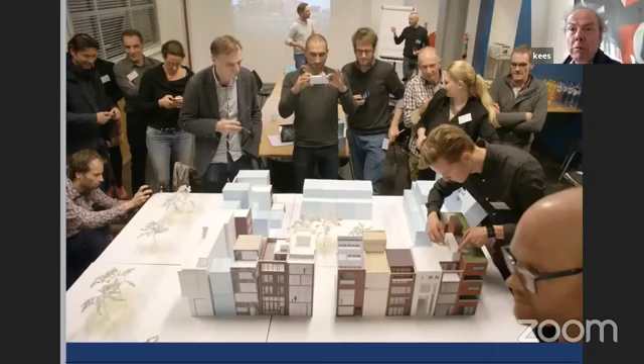So it's a very difficult way of working, but as soon as you get a little bit of experience in it, then it works quite smoothly. I think this process and the whole process of urban design is extremely dependent on experience. Probably that's also why urban designers are mostly old men like me, and not so young when they get big projects, at least.

Here you see a picture of how we work in this kind of process. So this is a housing block in Rotterdam. In the old days, we would just design the whole housing block, and people would get an apartment and start living in it. But this is working differently. Here the plots are being sold to people, and the people who buy them can bring their own architect. And we, as the urban designers and architectural supervisors, develop the rules and the typology principles according to which the houses are built.

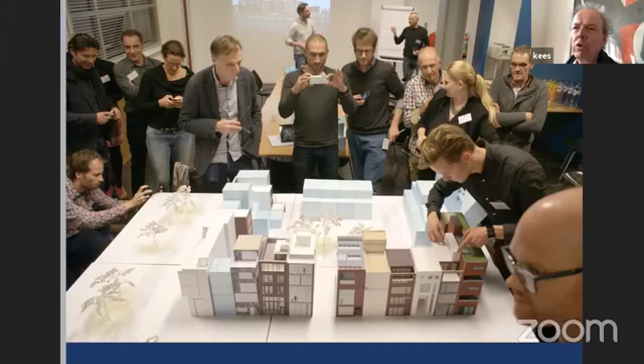So on the one hand, you have a strong coordination to create a project together. And on the other hand, you have the possibility for people to create very individual structures. And a big advantage is that the whole legislative approval process and also the budget control is much easier than when people build individual houses. So here you see the first houses being ready.

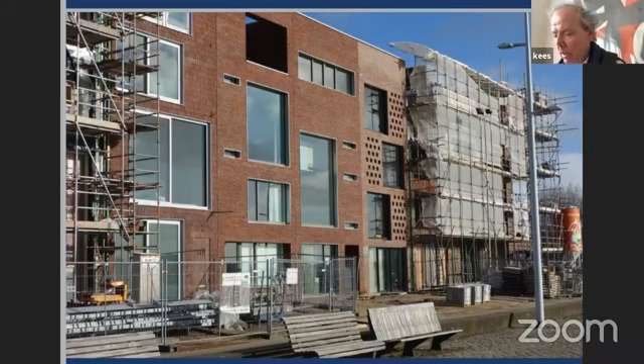And so we coordinate between the architects, which are sometimes one-man offices or young starters. We coach them to build in this integrated whole of a perimeter block. And the result is a kind of typological diversity, but also a social diversity, because different people are interested in living and working here. Of course, we work with co-working spaces. Houses are not anymore exclusively meant for living, but should also allow for work and home office, specifically in the times that we are in now.

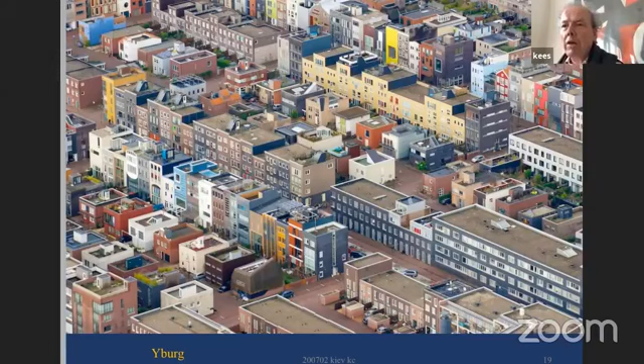So a result of this culture, which is a bit of a Dutch specific culture, is this kind of diversity, which some people find a terrible mess, and other people find a fantastic collection of anarchistic architectures. I think it really doesn't matter so much, but it is very clearly an expression of a very decentralized democratic society, where the diversity goes down to the one unit of the household instead of larger groups. So I think it is a very interesting phenomenon, and we are also working in that.

The idea of our office is not only to create perfect designs, which we not always do, of course, but primarily also to create a kind of community, an exemplary community of design people that are active in society. This is also the reason that we work a lot with conversion of former industrial sites and port sites, like here in the harbor of Amsterdam. I wrote a book called City as Loft, which is about this type of project.

And it was not possible to do this without building towers, because without building towers, you would not have enough building volume in order to change the office buildings in the lower area. We did not define where the towers were or what they will look like. We made a kind of game out of it. It's a very old game. It was already designed in 1991.

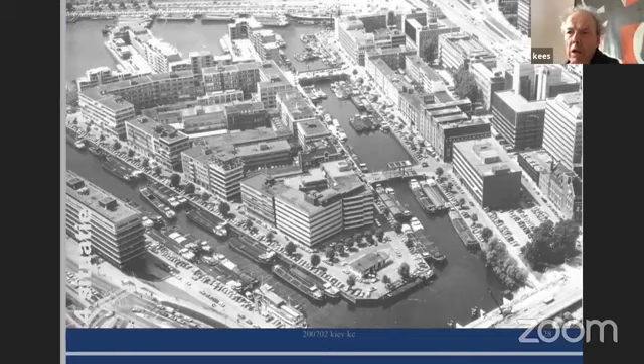Here you see the existing triangle with 1950s office buildings. They were half empty, they were derelict. And here you see the principle of gradual increase of density by building towers. And these towers had to behave themselves according to certain rules so that they would not hinder themselves, they would not spoil each other's view, and they would not cast too much shadows on their neighbors.

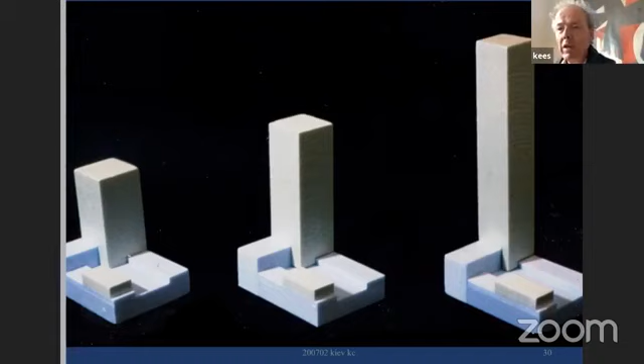So there was a whole set of rules which would lead to the situation that when you would build, you would not build the left tower, because you would build a fat tower with a lot of apartments on the north without sun and view. And you would not build the tower on the right, because that would be very expensive and have mainly staircase shafts and a little bit of space for apartments. So you would be somewhere in the middle. So this regulation more or less mediated automatically what would be the result of the buildings.

And here you see what is going on now. In the meantime, there are even more towers that are under construction, and it's extremely successful. But what is actually the most important merit of the project is that it gets people back into the city center, because they are all apartments. And the buildings have street level areas where gradually restaurants, galleries, and so on are settling down in an area that used to be relatively empty.

And so it's quite an important piece of urban renewal in a social sense, apart from the exciting skyline that is being generated. So this is the tower we built ourselves. It's a podium with offices and shops and galleries and a hotel. And then on top of it are two housing volumes, one tower and one block that is cantilevering across the water. On the other side of the water, you see the Art Academy that we also constructed, but I won't talk about it today.

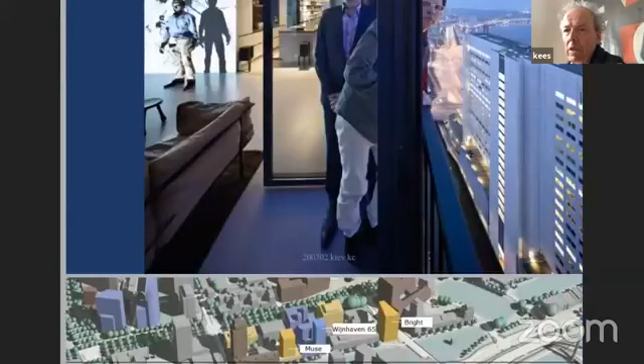Here you see a kind of overview of towers that are still under construction. And we have had a fight with the city. So you can see that an urban designer only has a limited influence on his city or on any city. After a while, something else happens, and then your concept is being lost, because the front towers that you see along the water do not comply with the rules. You see that they are much fatter.

This is a mistake by the local government of the city, and the result is that a lot of the slender towers in the middle will lack a view to the river, which was not the idea of the original urban design, but we cannot do anything about it.

So this principle of densification as a kind of means to create money, to create more mixed use and more urban value and more social exchange, we have been applying in other cities. This is the main railway station in Zurich. And on the other side of the tracks, you see a whole development, which was designed a little bit according to the same principle. Here you see an impression of the central space, the so-called Europa Allee.

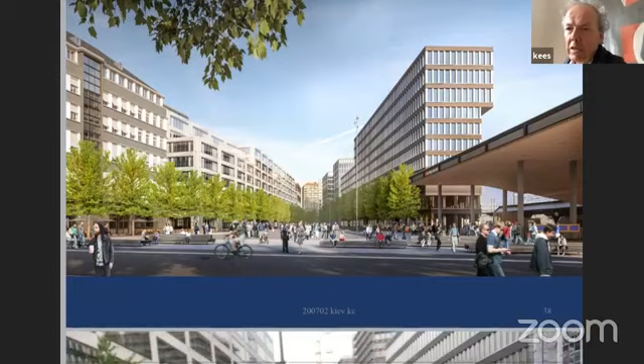You know that Switzerland does not belong to Europe, but it's still called the Europa Allee. And it's a conical space in which building blocks are built. And these building blocks, again, they are about 20 meters high, but above 20 meters, they may have a certain volume as long as they do not hinder other buildings. At this moment, the project is almost ready.

And this is a picture of all the KCAP people, all the people of my office, about 120 people that recently visited the site in Zurich. We do a kind of social event and excursion once a year with all people of our office. And you see that the space is becoming quite intimate and quite urban, and the density does the city very, very well.

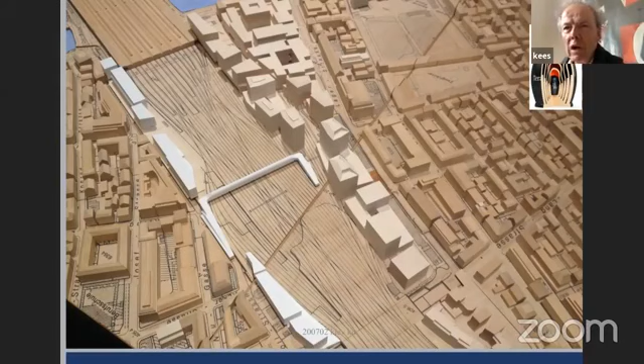Here you see the model, and you see that the principle is consisting of blocks, and most of the blocks have two little towers on top of them. This was started in a competition by one architecture office, Caruso St John. And then in the next competitions, this was taken over by other architects, and it creates quite an interesting harmony between the different building blocks.

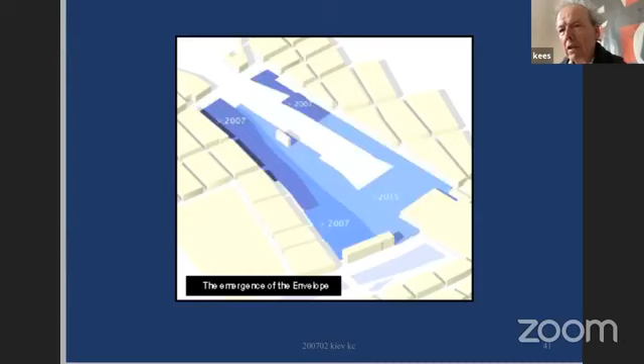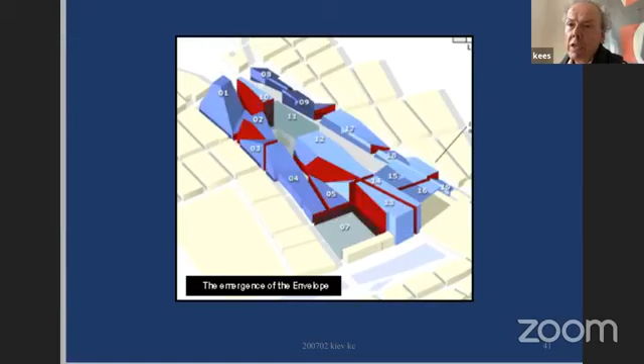We apply here a principle of subtraction, which you see symbolized by this dynamic picture. So when we build in such an area, we do not, like a traditional classical architect, look at what kind of beautiful architectural sculpture we can make there, what is the maximum height, etc. No, we are filling the site like a big chunk of cheese up to 120 meters full, and then we start cutting out the public space.

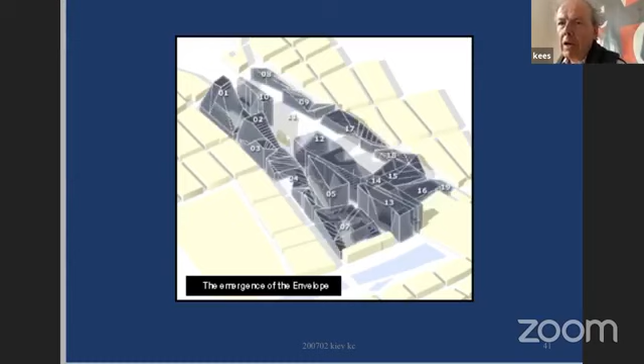Then we start cutting out the planes that produce too much shadow, and at last we are cutting out the view lines that we want to have in the area. And then the residual envelopes are the maximum building parameters for the buildings of the blocks that are going to be constructed. So you can clearly see that in this model.

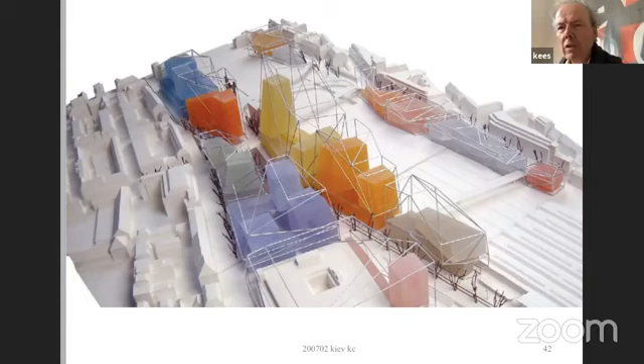So the wireframe that you see is the maximum building envelope, and the colored volumes inside the wireframe are the actual buildings that can be very different and very diverse, as long as they meet the regulations that we have been imposing. It leads to a much more creative urbanism. It also leads to a much better profitability of the buildings for the investors. And it also enables a much better division of programming than the traditional way of urban design.

This is one of the buildings, one of the first ones. It is a building by Caruso St John Architects, and the grade level is public space, restaurants, shops.

The podium up to the 20-meter line is offices, and the two volumes that are crowning it are two small apartment towers. So you have a kind of integrated mixed use within the buildings as well. You see some other buildings that have adopted the same program,

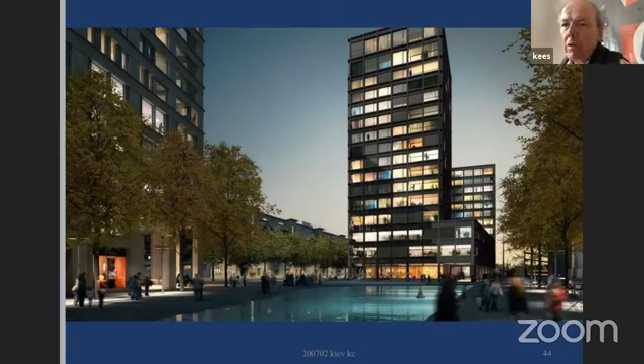and you see here the central square of the area, which was going to be called the Le Corbusier Square, but then the socialist green government of Zurich discovered that Le Corbusier had been a Nazi sympathisant, and then the naming of the square was dismissed. I don't know what it is called now.

Here you see another building. This building is very interesting because we had a lot of protests from local people and specifically also younger, creative, green and left-wing people against this project, because they were saying this is only investment construction, which it is not, because it has about 60% housing in it. It has cinemas, it has a hotel, it has shops, it has cultural institutions, etc.

And they tried to prevent this project by a referendum. A referendum is possible in Switzerland. If you collect a certain number of signatures, then you go voting. And when the voting is over 50%, then a project is accepted or is dismissed, and then the project just is dropped. So they did that, but we had a 55% majority for this project, so it was constructed in the end.

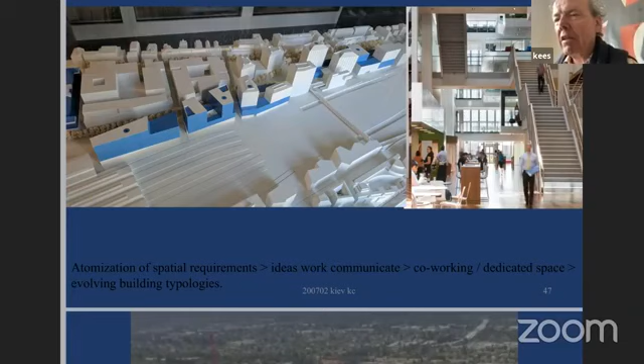which is quite interesting because normally these high-tech firms would have a campus in Palo Alto or anywhere else where they are in the middle of nowhere. They need buses and cars to get the people to their campus. The campuses are gated. You do not get into it. There's no interaction with the city, etc.

And Google was one of the first tech programs. Now also Dropbox and other companies are following this principle to say this is not good. We have to go back into the city, like also industrial manufacturing is gradually becoming clean and returning to the city. And so Google went here, and the first thing they asked was, can we make bridges between the buildings so that we can interconnect all the buildings?

And we said no. We are happy if you come here, but you have to have lobbies and staircases and elevators, and you go from one building into the other by public space, so that you activate public space, and around your entry lobbies there will be a restaurant or a coffee shop where your employees will sit and will develop also their ideas, so that you will contribute to the social machine of the inner city. And so they accepted this, and it's quite successful.

Of course, after a while, they closed their lobbies for security reasons. So you can go into some lobbies, but you cannot go further, which is a pity. But in the end, it's a very interesting development, and also a paradigm shift of the eccentric settlement of high-tech firms, like this one.

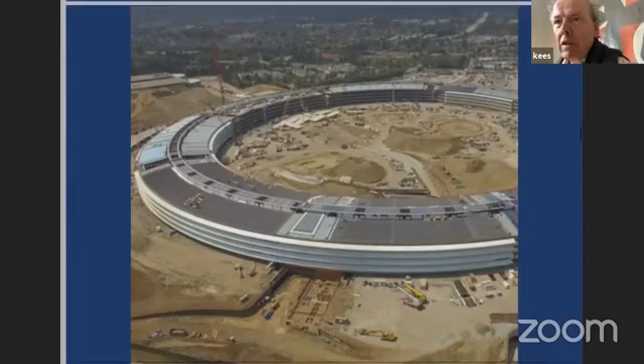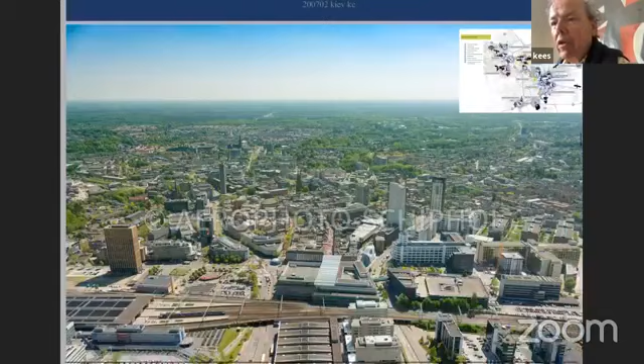It is, let's say, as closed as the Apple operating system, which also doesn't allow any multiple use by other softwares, which I think looks like a flying saucer, like a UFO, utterly modern, but I think it is utterly old-fashioned, and I think the modernity is more to be found in this kind of development that we did with the center of Zurich.

So you can see that we work a lot in railway station areas also. And that is not for nothing, because we are one of the drivers of the so-called TOD, transit-oriented development, which simply acknowledges that public transport is the most important driver of communication and of economic development today, and therefore public transport should be stimulated as much as possible, also cargo by public transport. And railway stations should be hubs in which different mobility forms should connect to each other.

And therefore, they should also accommodate high-density developments where mixed use, living, working, entertainment, etc., are close together, so that they form mobility nodes between other railway station areas, and therefore also reduce the nuisance of the countryside and the overuse of cars and so on.

So we are developing the railway station area of the city of Eindhoven, which is one of the bigger cities in the Netherlands. It is about, I would say, 600,000 residents. It's an important city because it used to be the hometown of Philips, and Philips was the most important multinational in electronics in the Netherlands, like Sony in Japan, in the 1950s and 60s, and still is very important.

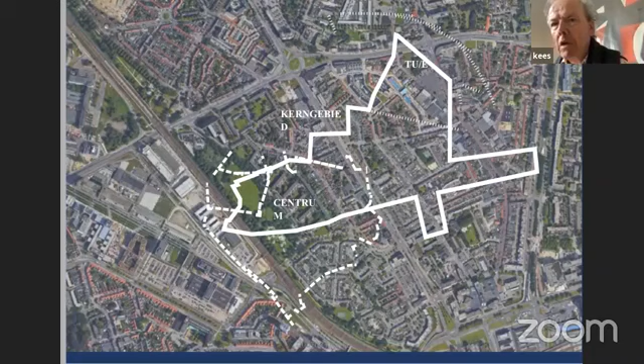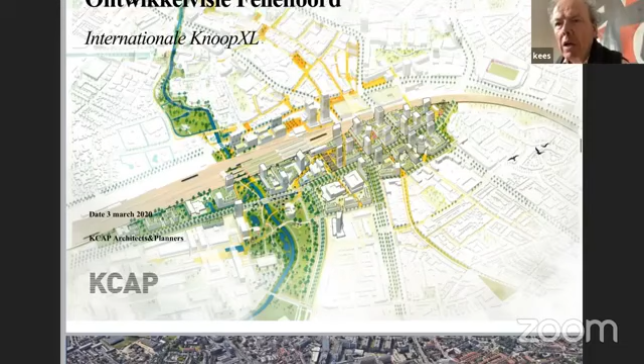This is more or less the area. You see the big white line, which is the area, and the dotted line is the center. And on the top right, you see TUE, which is the technical university in the area. So this is the vision that we have developed. It's an enormous project. It's about 5 times bigger than the Zurich project. And you can see the difference in this slide.

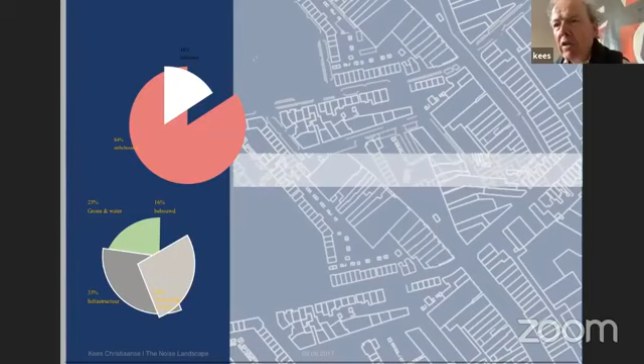So here you see the build. This is a picture that is a little bit distorted, but what I wanted to say is 84% of the area is now non-built, and 33% is traffic infrastructure. The main boulevard is 107 meters. It's a little bit like the boulevards in Moscow, the kind of idiotic Soviet traffic arteries where no cars are running, so wide that you can hardly see the buildings on the other side of the street, like the Karl Marx Allee in East Berlin.

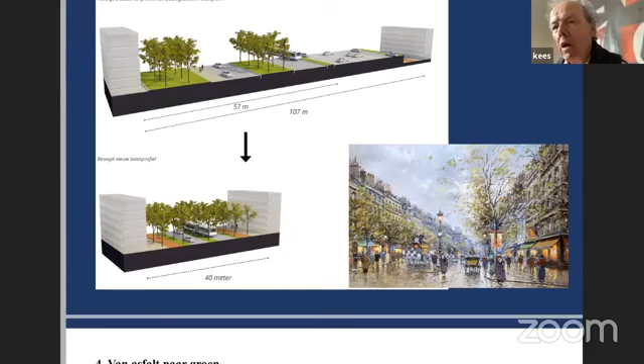And we are going to reduce the main boulevard from 107 meters to 40 meters. So we gain 60 meters of developable land for free. It is city land, so it's a gold mine for the city. I'm sure in Kiev you have the same situation. You can take away a lot of road system, turn it into urban development, and everybody will benefit from it. And you will also be able to finance it because it is land that previously did not exist as commercial surface.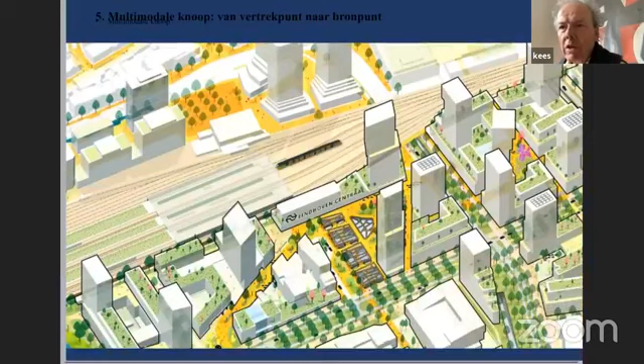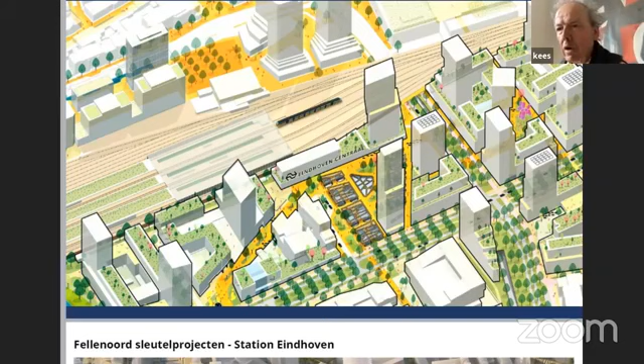So here you see this whole area, including a park and a river. And we create a very fine-meshed pedestrian system. On 2 sides of the railway station, we create new railway squares with bus stations underneath, with a lot of bicycle storage for biking and e-biking, which is becoming extremely popular in the Netherlands. It was already popular, but it becomes even more popular.

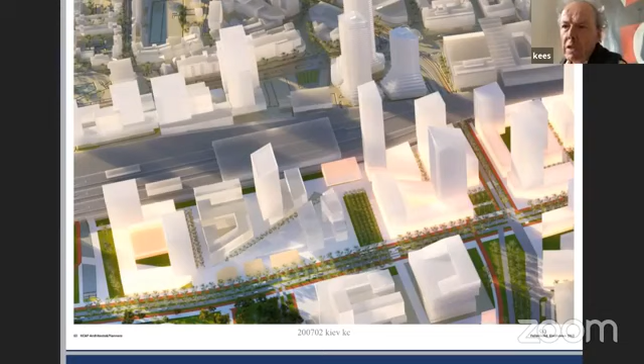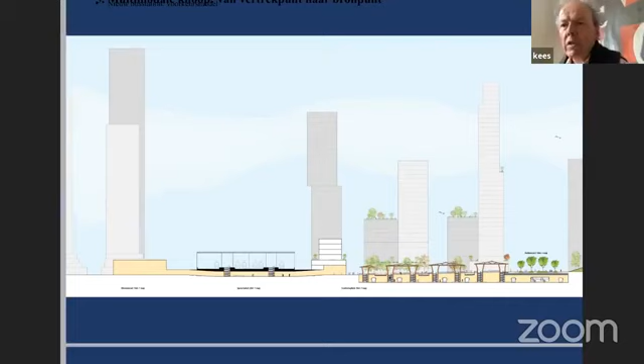And here you see a model that we use together with the city and the architects that are building their projects to gradually materialize the project. It's a very exciting piece of work. You see a section through the passage underneath the railway, which has also been renewed and is a beautiful, generous shopping passage. The bus station and the real estate around it. You see the station square and the boulevard, which has been reduced to 40 meters. And here you see the whole scheme in its diversity.

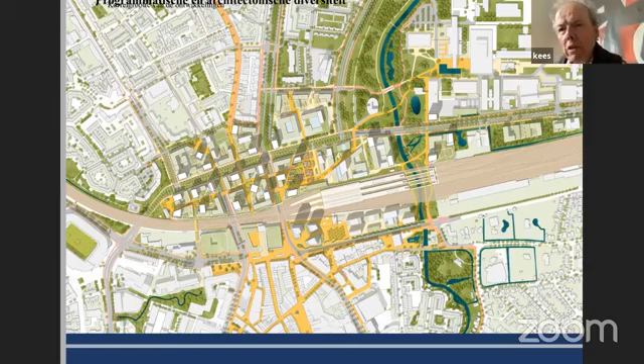So the city actually gets a whole new neighborhood, which largely can be financed due to this empty land, which has a lot of connectivity, activated connectivity between the north and the south part of the city, which didn't exist before, by these yellow lines, where there are a lot of mixed-use grade level activities. And it has a beautiful new park and river, also as a result of taking away road lanes between the railway station and the university in the top right corner.

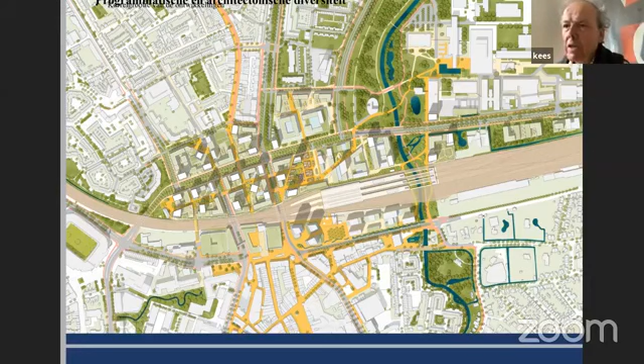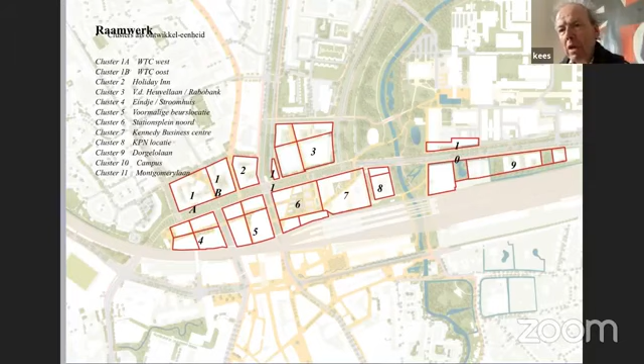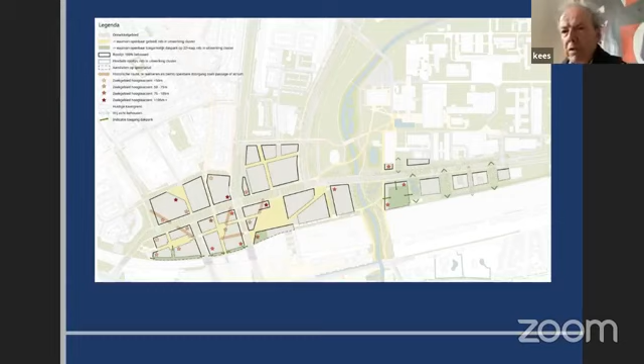We are working with a development framework where we have the owners and the new plots being into one development stream. So successively we are phasing this project and gradually implementing. And we have the same kind of rules that I showed you in Zurich, that I showed you in Rotterdam for the built environment, for the building blocks, so that they can develop maximum density against a good situation in terms of environment, wind, shadow, sunlight, and view.

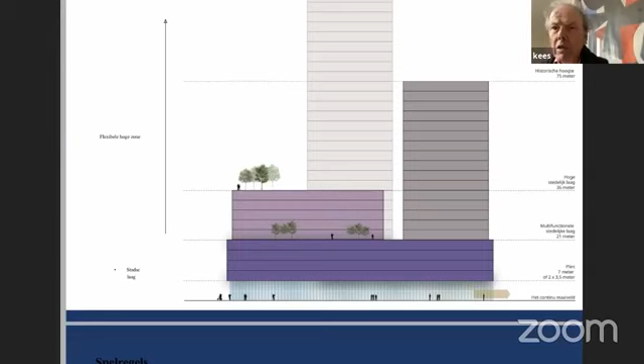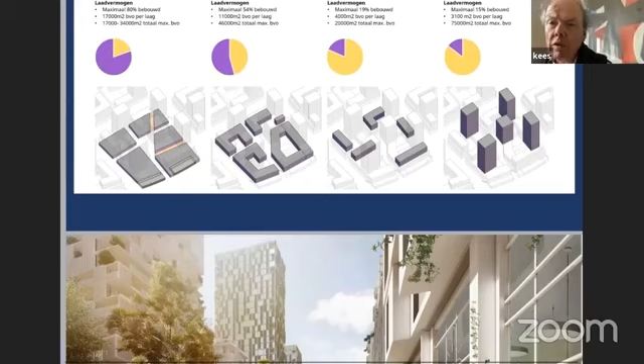They are related to different height regimes from the past in the city of Eindhoven. So there are quite some buildings that are 75 meters high, and there are quite some buildings that are around 35, 40 meters high. So we also want to express this tradition into the blocks, and then we allow also to go much higher, up to a height of approximately 150 meters. Here you see the principle of how that works, and all the development obviously has to develop courtyards that are semi-public, so that also in the courtyards activities can be developed.

This is then an impression of the boulevard of 70 meters wide. It's about the same width as the Champs-Élysées in Paris, which is actually something like 69 meters. So now the first developers and the first architects are coming. So these three towers that you see is one of the first projects. The left tower has already been built, the square tower, directly next to the old railway station.

Here you see a model of that project in the wind tunnel. It's very important. You see that the towers are kind of becoming broader in the socle, in the podium. This is to increase the surface, so that accessibility is directly from the street to the larger surfaces. But it is also a device to create a better wind condition.

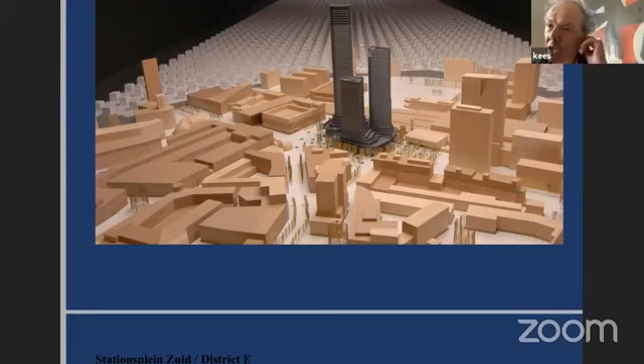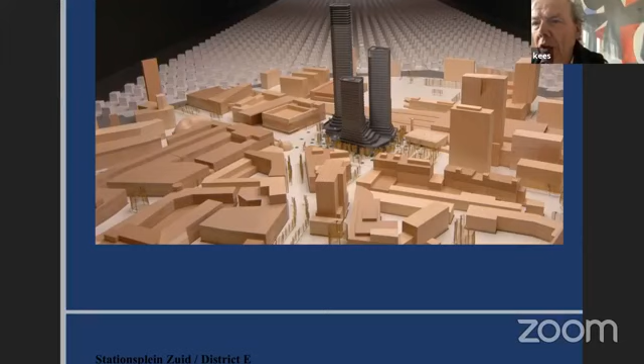So these towers normally, if they would have the same section from top to bottom, they would have an enormous amount of wind production. But by means of these feet, let's say they look like large boots, they get quite a favorable wind climate. And you see that around it, we are creating a new railway station square on the center side. Here you see the main throughway through this area, and you see the step downs of these buildings.

And in the end of this axis, you see the first Philips building, the first big industrial Philips building, which was built by architect Roosenburg in relation, in reference to Sullivan's industrial architecture in Chicago. And this Mr. Roosenburg, he was the grandfather of Rem Koolhaas. So you can see a little bit where the family tradition of this architect comes from.

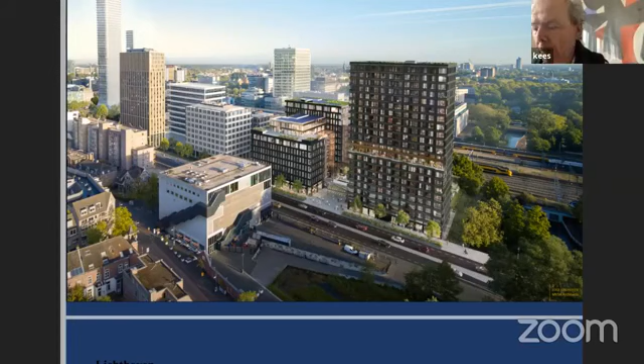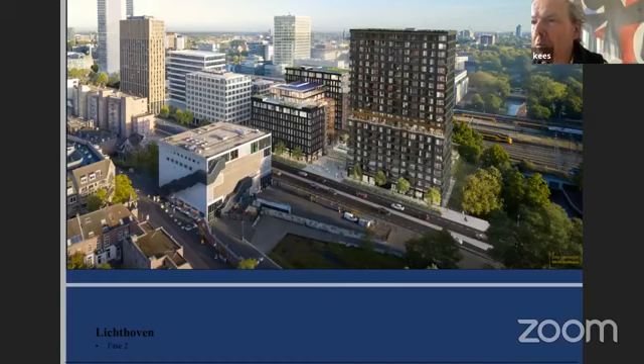This is the other side. So on the left side, you see the towers I just showed you. In the front, you see a pop concert building designed by MVRDV. And these black buildings we just approved, and they are just starting to go under construction. You see, by the way, on the right-hand side, the river running under the railway, but the hole underneath is still very, very tight.

And you see that we are working on other buildings around it. This is a very interesting building for a telecom company, which has a very specific energy label system and a specific materialization.

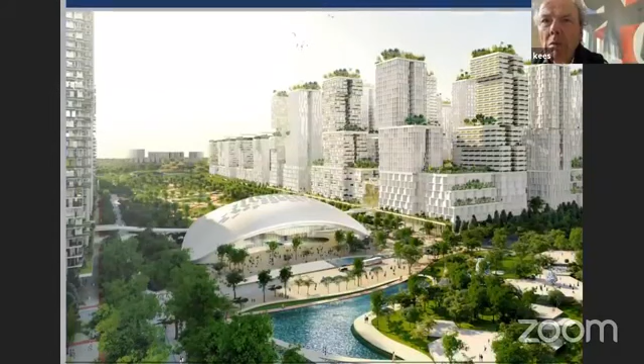The biggest railway station project that we have ever been doing, and probably will ever be doing, is the Jurong Lake District in Singapore. This is a project of about 4 million square meters of mixed-use development with an underground railway station. It was an international competition that we won, and we have been creating the master plan in the past couple of years. It is now resting because of the Corona crisis, but it will probably be taken up later for further development.

And the principle is that all those principles I told you about before have been returning in this project, only on a very big scale. So the minimum height of towers here is 130 meters. And we didn't allow for a Dubai skyline. We said, okay, if that is the case, then every tower is going to be 130 meters and every roof has to be flat and has to have a roof garden, so that from far away you will see a neighborhood that consists of one big plane in the air of roof gardens.

This is possible in the tropical climate, where you can really grow very large vegetation elements on the roofs of buildings. You can see it in a minute in other pictures that I show you. And the idea behind it is that we create blocks that are so unbelievably dense that we free up an enormous amount of public space, so that the built footprint of the neighborhood is very low. And therefore the amount of public space and park, which is extremely important in countries like Singapore with this tropical climate, is maximized. So more than 50%, I think even over 60% of the surface of the neighborhood is made out of green.

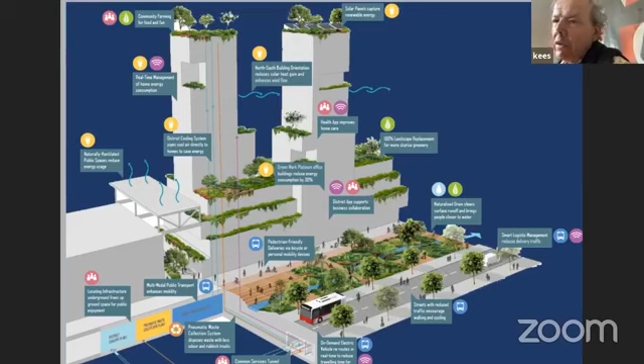The big central park in the middle with the sinus form and the triangular roof, that is the railway station. The railway station is up to 30 meters underground. It also contains all the bus parking for buses that drive down from outside the neighborhood, and all the logistics underneath the park, so that no public space is disturbed by logistics and traffic, and the park system is kept to a maximum. And you see those 3 islands.

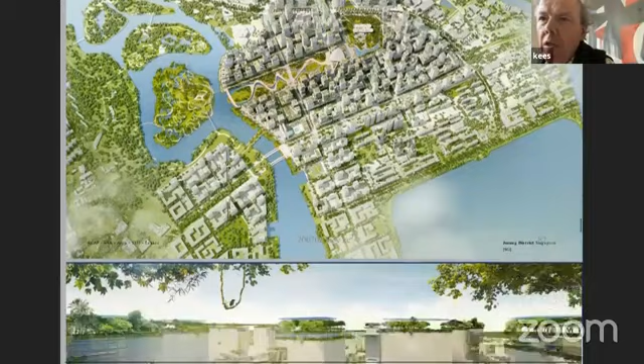So here you see the basic section of how this neighborhood works. You see the streets. The streets are quite narrow. This is necessary in order to prevent sun to go into the streets, so that there is enough shade. In the tropical climate, contrary to in Switzerland or Holland, we don't want to have sun. We want to have shade, because the sun is so extremely hot.

And therefore, we create streets that are all in the direction of the prevailing wind, so that there is a kind of Venturi effect of natural ventilation in the streets, and they are narrow in order to provide shade. You see also the railway station on the left in the section. And then you see that the buildings form a basic podium of something like 10 stories. Then they have a green deck, which is also partly publicly accessible. And you can walk across the roof from the one block to the other block.

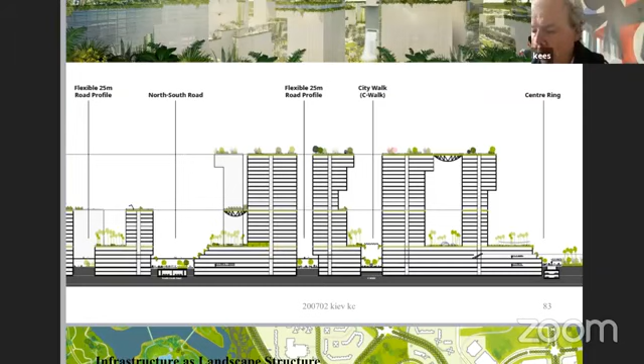And then the towers are starting. And as I said before, instead of in Dubai or in Hong Kong or in Shanghai, all the towers have to be the same height. They have to be flat roofs, and they have to have a roof garden on top, like you see in the top image of this slide.

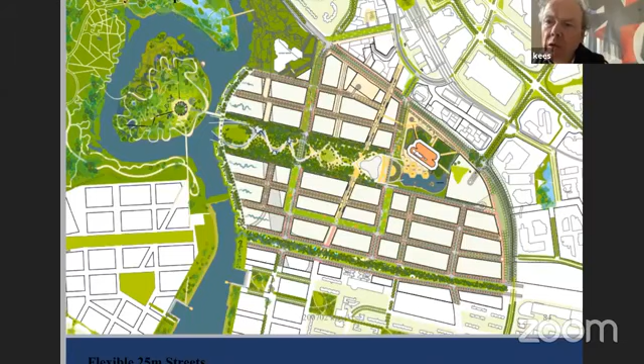Also here we work with the rules. So what you see is only an impression of the character of the urban design, but not the specific buildings, because the buildings and the blocks will be designed by investors and architects that have to follow the rules, and then are being coordinated and coached by us to build their project.

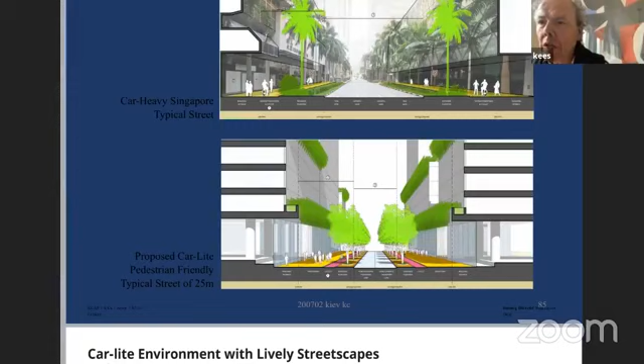The roads, as I said, they are narrow. They also have a flexible profile, so that they can gradually adapt to the development of intelligent mobility. So it starts in the beginning with cars and public transport by buses, because there are no rail connections yet. So then you see the top section, but gradually during the development of the area, they will turn into free bus lanes or pod lanes, and then bicycle roads, and then there will be more and more space for pedestrians. So the profiles of the streets are basically adaptable to the mobility situation in the district over time.

You see an impression of the spatial character of the area, and I think although the buildings are quite high and the streets are narrow, it creates a rather generous spatial impression. We also cover the motorway that runs across the area. So here you are walking on top of the motorway, which creates also a lot of additional public space and real estate, and therefore the calculation of the financing of covering the motorway has been positive, and this is going to be done. This cover will also contain a lot of water absorption system.

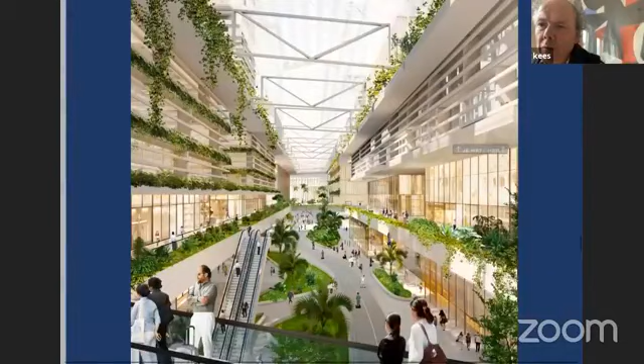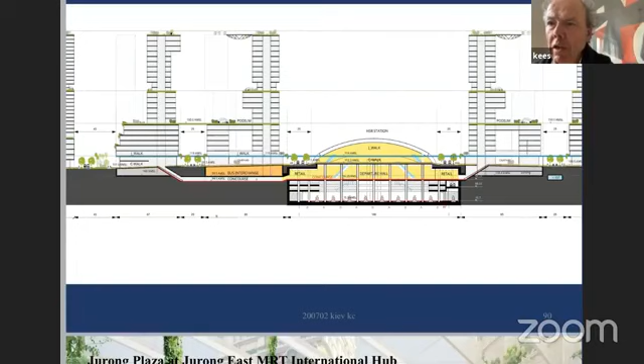So that's the Jurong Lake District, and you see here a couple of impressions of partly also interior streets that all have natural ventilation systems in which by the form of the buildings and the form of the roofs, the airflow is being stimulated, and therefore air conditioning is less necessary, while at the same time in the floors and in the facades, pipes with cold water are streaming in order to keep the facades a little bit cooler than the environment. And here you see the underground railway station embedded in between the buildings. And here you see the railway station square from inside.

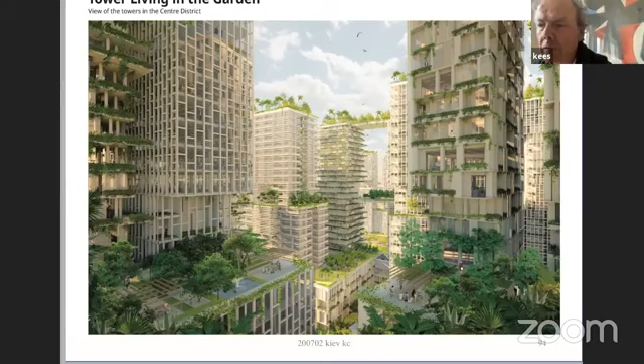Another image. Of course, this is not architecture. This is just an impression of volumes. The architecture that you see is generated by a small software that we have. So we have a kind of software in which, when we draw volumes, we can automatically differentiate it with different facades and so on, which is very handy because you can work much quicker.

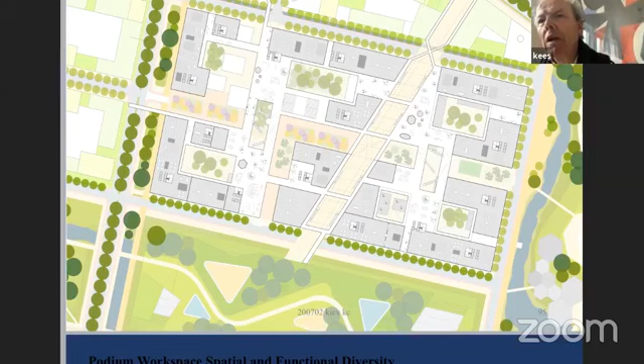And this is a typical block in the Jerome Lake District, which shows that it is not closed, but it's open, because we want to have courtyards that are activated. And above all, we want to have the spaces naturally ventilated and not covered and be air conditioned. So this is the kind of character that will be hopefully realized in this Jerome Lake District.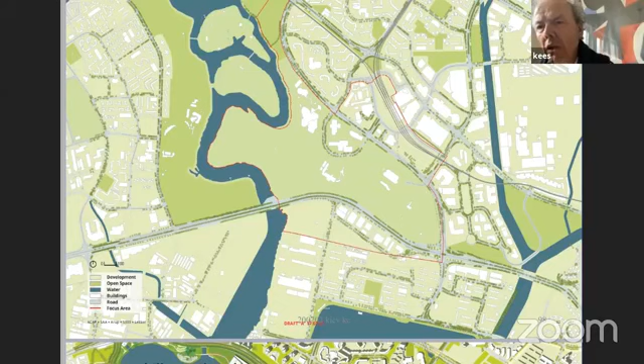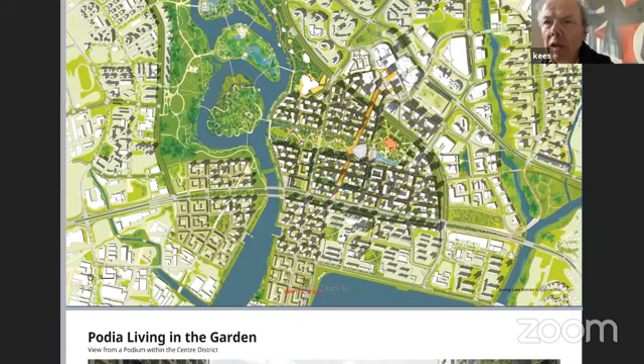And here you see the existing situation with the motorway below and the peninsula still connected. And here you see the developed area where the motorway is covered. There's a connectivity to the sea of public space, and you see that the islands are detached from the mainland. Yes, so that was Jurong Lake District.

And I would like to finish with continuing on water, because we are increasingly working with water, which is also, of course, natural for us as Dutchmen. And we are also exporting our knowledge with water to other countries, among others to the city of Shenzhen, which you see here, which is one of the biggest cities in the world.

It's about 45 kilometers long and about 35 kilometers wide. And you see that it has a lot of hills or even mountains. Sometimes they are almost 1,000 meters high. And in these mountains, they have created over time a lot of reservoirs, the blue ones, which are the original drinking water reservoirs. And of course, they are partly old and not usable anymore.

And we are creating a concept of how to use these reservoirs for public space, but also for water management and stormwater catchment and runoff in the city, and also how to reopen the rivers in the city of Shenzhen and the streets to have the rivers on the surface again, have them natural again, let them evaporate the water and create a better climate for the city.

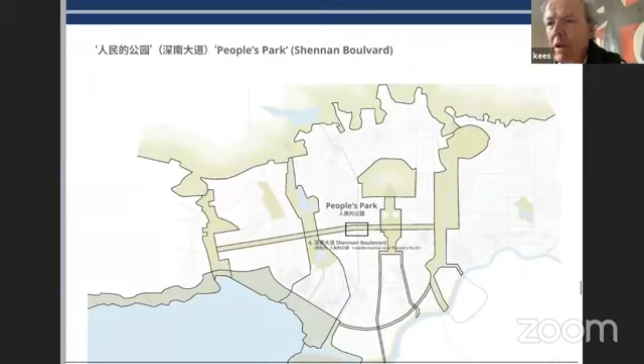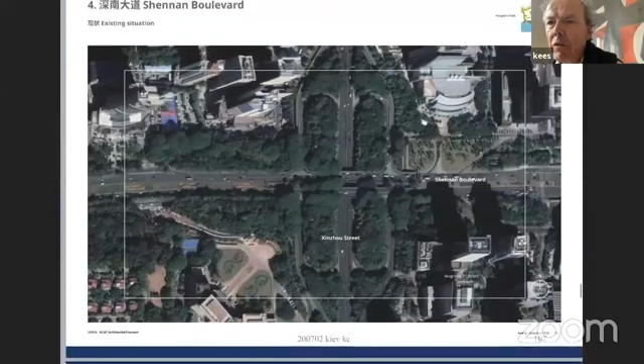So one of the projects is the central streets in Futian, the center of Shenzhen, which is this one. We do a little bit the same as in the city of Eindhoven. You have enormous motorways, like you see here, with a lot of green where nobody goes. And you have an enormous potential of development, and at the same time there is a need to recreate better green, environmental green, and better water management. So we are working on a lot of exemplary road crossing sections.

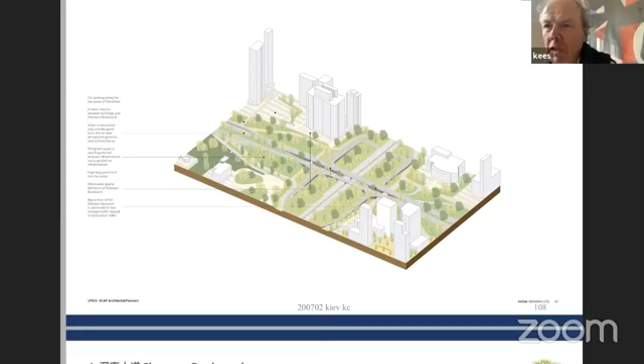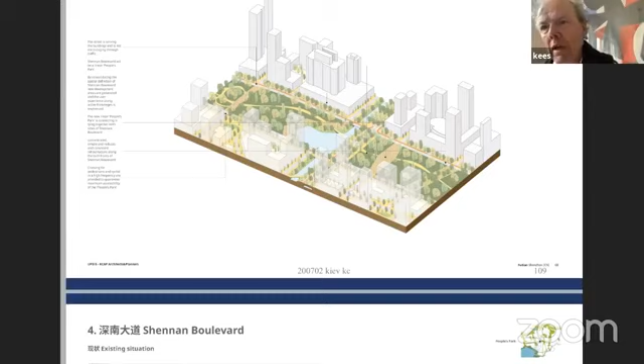This is one, for instance, where you see the existing situation, and you see the future situation, where we take away the motorway, we make normal urban streets out of them, we introduce surface water again of the river that is in pipes underneath the streets, and create a park that is accessible for residents on the spot where the motorway was. But at the same time, we add built volume, which can then also partly pay for the investment in the public infrastructure.

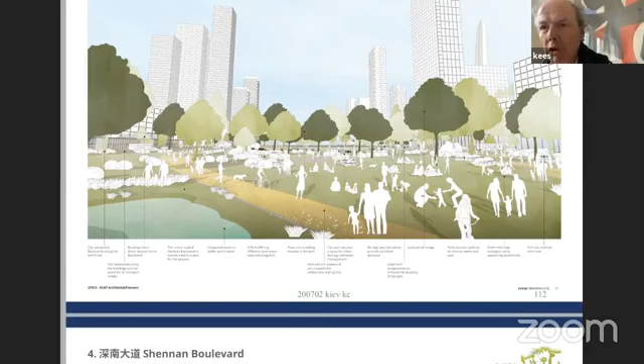So this is the Shennan Boulevard, which is the main street of Shenzhen. Not so very attractive, of course, to have a main street consisting of 10 motor lanes. And this is a little bit the situation graphically represented at the moment. And what we are doing is turning it into a park, creating water, reducing the size of the lanes, partly laying the motorway under the street, etc. And then you get a kind of condition like you have in Central Park in New York, for instance.

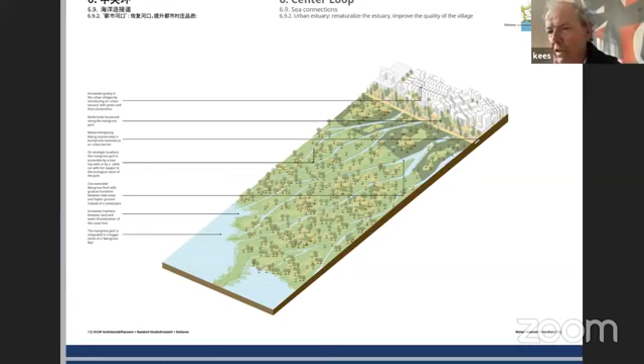The same we do with the edge of the city to the bay of the Pearl River Delta, where there used to be a lot of mangroves, these very important natural trees that stand in the water with their roots. So we recreate this kind of condition and give the street and the city a clear edge, so that this can be used both for environmental and climate mitigation, as well as for public space and leisure.

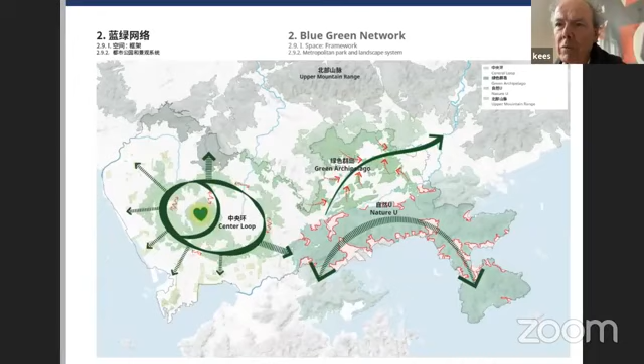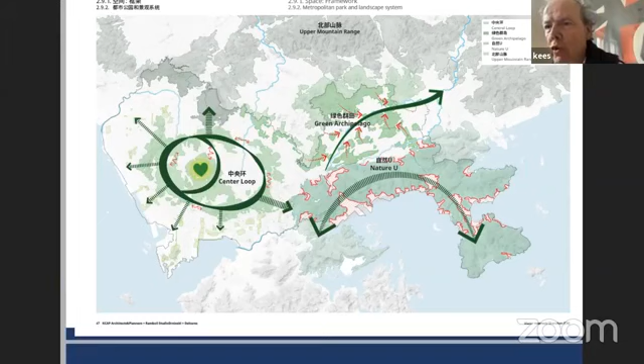This has led to a project where we were asked to do many of these reservoirs. So we are working on a concept how the reservoirs can be put into a different concept of either a center loop of reservoirs or a green archipelago of reservoirs, or a nature U where there's a lot of mountains and forests. And so what we basically do is we take the mountain, we take the reservoir, we take the rivers that are mostly under the streets, and we open up everything.

We create conditions in which the rainwater runoff and the sewer system of the districts around the areas are being connected to this. Purification plants are also reconnected to this system, so that an integrated water management system for the whole city can be created and gradually adapted.

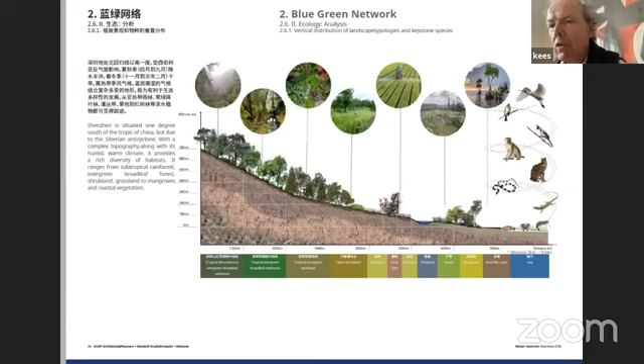So it's an enormous reconstruction task that we are working on, creating purifying wetland pockets in between to purify the water that is too polluted, looking at the fauna and flora, type of vegetation, animals. We have biodiversity experts and hydrologists in the team that work with us in order to create a water and ecological analysis.

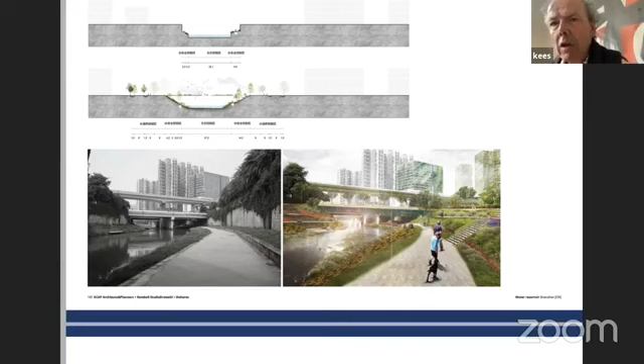And this is an image how one of those rivers looks before and after. The top section, you see everything is concrete and stone, and on the lower one, you see that we completely regreen the shore of that river.

And the last project is maybe the most spectacular. There's a peninsula on the east of Shenzhen into the Chinese Sea, east of Hong Kong, which is an important holiday resort for the people from Hong Kong and Shenzhen. But there are a lot of typhoons, and there's also a danger of tsunamis.

Normally you had mangroves and you had forests, but now you have urban development and you have dikes. And these cannot really properly protect the areas against the water. We have to take into account sea level rise, etc. And also the high concrete constructions that are necessary to protect are generally very ugly.

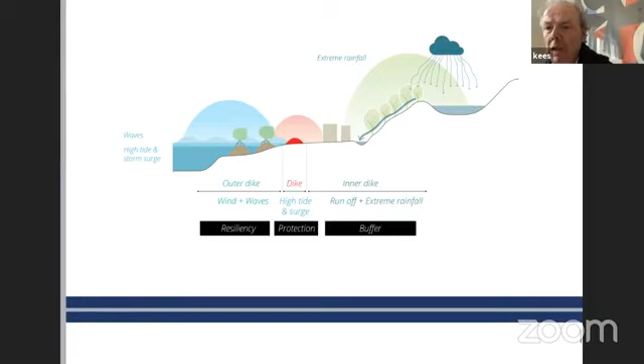So we have been creating a system of terraces, of boulevards, of public spaces, of jetties, of dams, of dikes, of basins, of wetlands that can absorb stormwater from two sides and at the same time create a quality environment.